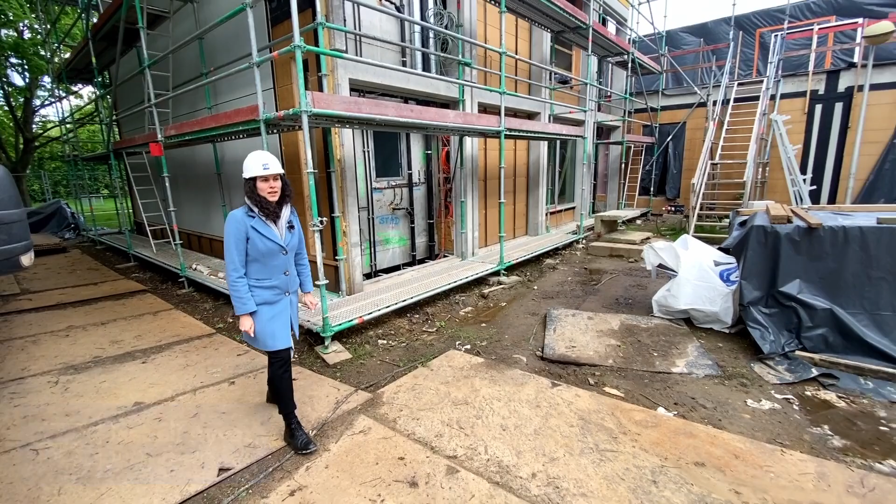Hi Waldo, thanks for having me. Hi Isabel, welcome. So what is that all? Yeah, where are we?

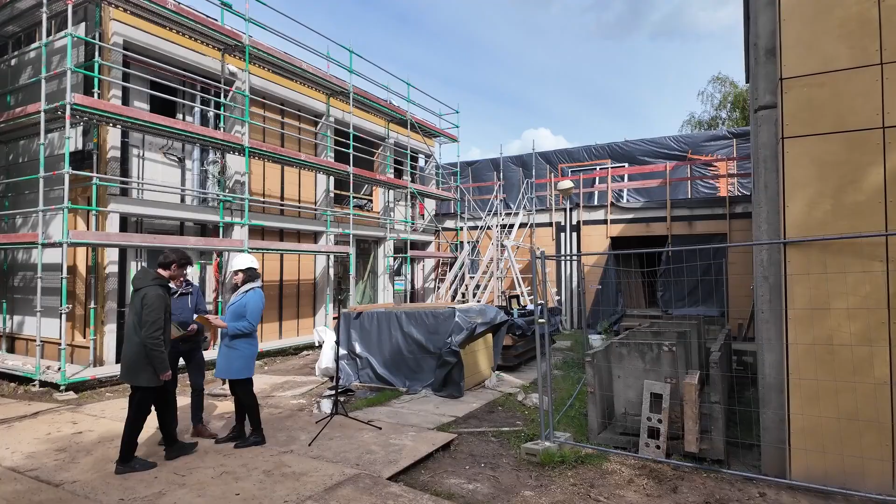This is the heart of our campus, where we have two living labs, two construction sites, where we really try to stretch the possibilities, the state of affairs in design for change.

Okay, design for change, what is that? Well, for a long time we understand now that the waste we produce during refurbishments and demolitions is not because we can't build good buildings, but because the buildings we build are not adapted and ready for future changes. So we continue to change them with the wasteful consequences and material consumption that we know. So that has to be done differently.

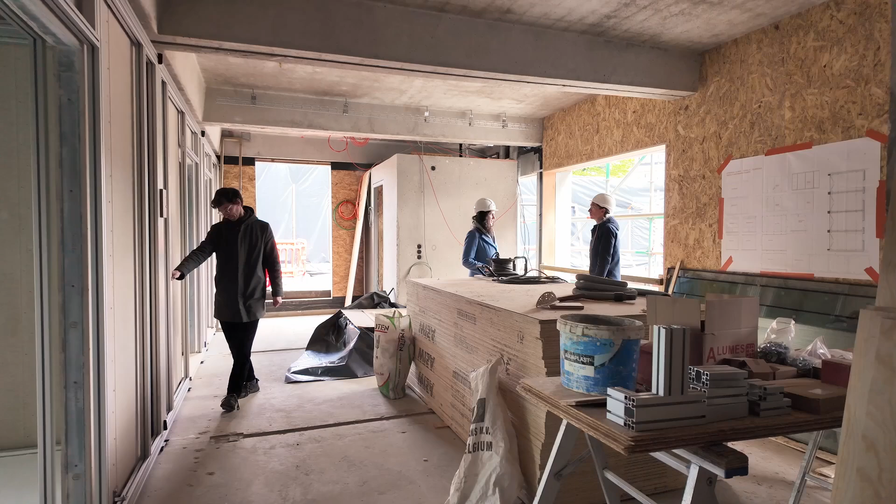Okay, so you talk about adaptability. What does that mean in the facade industry? What makes a facade adaptable? Well, there are different strategies. We can distinguish two different approaches with a different objective. First one would be design for longevity. The other one would be design for recovery and reuse of components.

Can you be specific about what that means for the facade, longevity? Well, for each of the strategies you can apply different design qualities, different execution qualities. Design for longevity would really mean that you have very generous, generic, but also robust facades. That means you have to choose materials and also spatial, architectural solutions that can stand the test of time, whatever the future function of a building will be, whether it's a house or offices or something else, then you really want high quality materials.

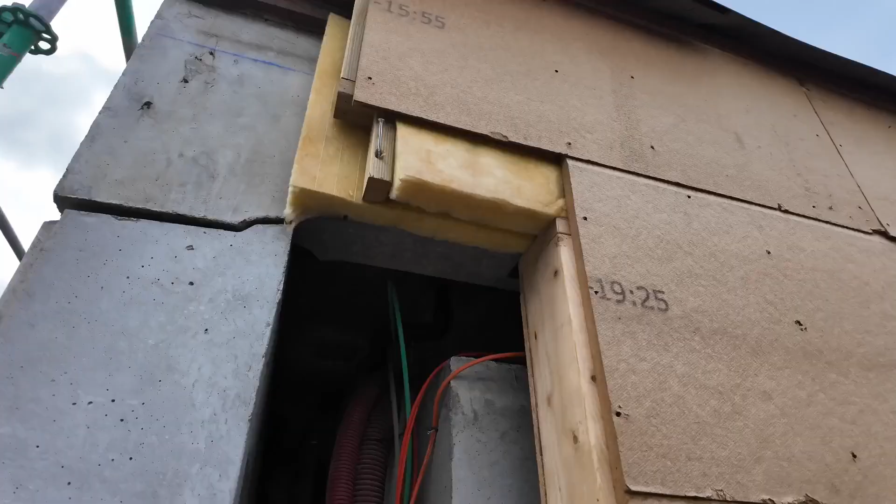Okay, and how about the second strategy? In terms of recovery and reuse of materials, it becomes really important that they have qualities like independence, both functionally, so technical services are not integrated in every part of the facade, but also that the components of which the facade is composed are easy to recover, that the connections are reversible, so that we don't damage them when we want to change a window for a door, for example, or when we want a new cladding, which may use second-hand materials already.

Okay, and can you show me something? Yeah, we have examples in the new buildings. Right, cool. Then let's go and see.

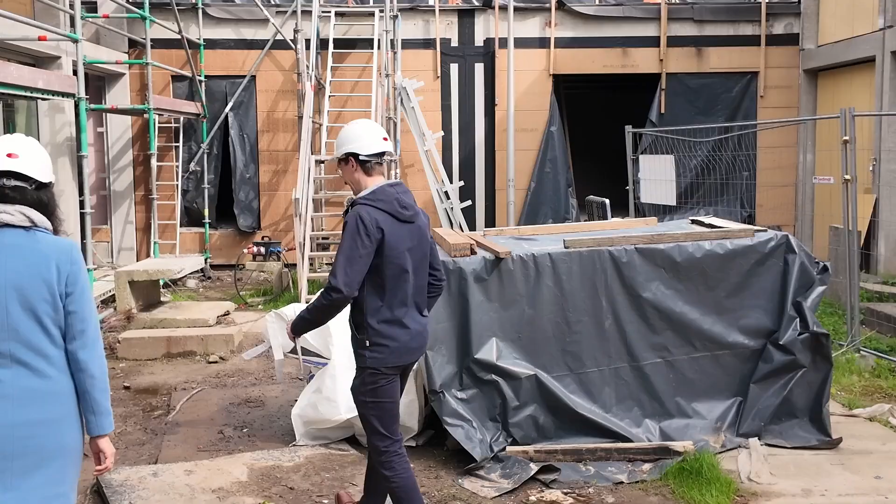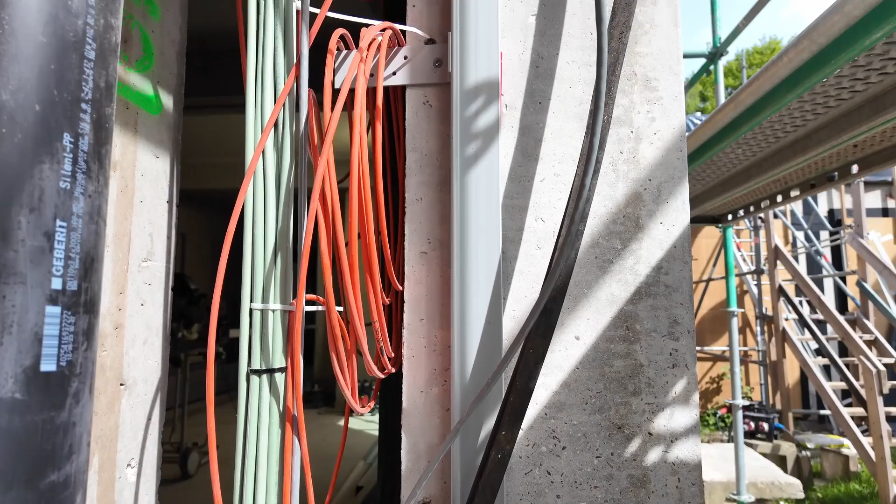Okay, so what can we see here? Well, in the Willy van der Meere Living Lab, the designers, makerarchitecten, chose an independent outside metal frame that makes the whole solution very modular, and also preserves that independence and reversibility.

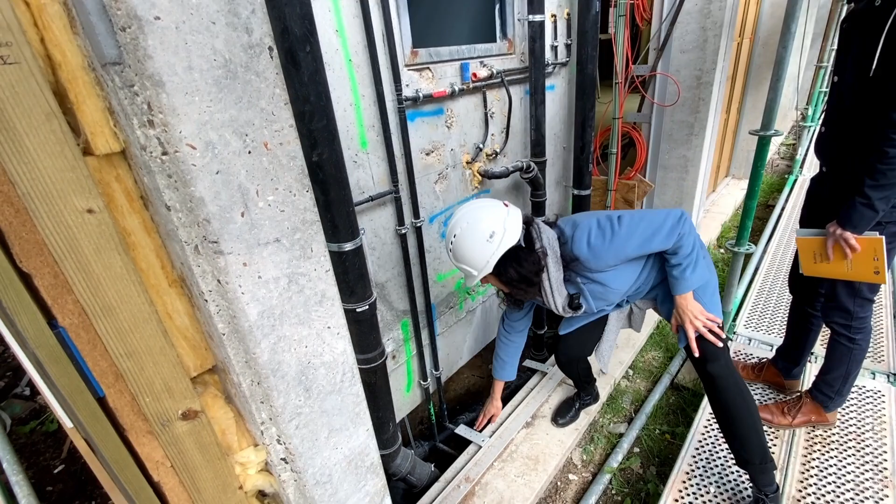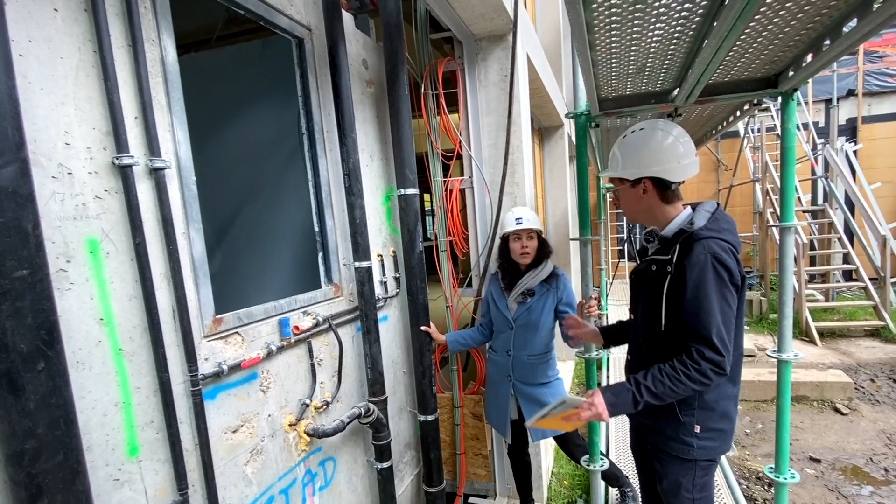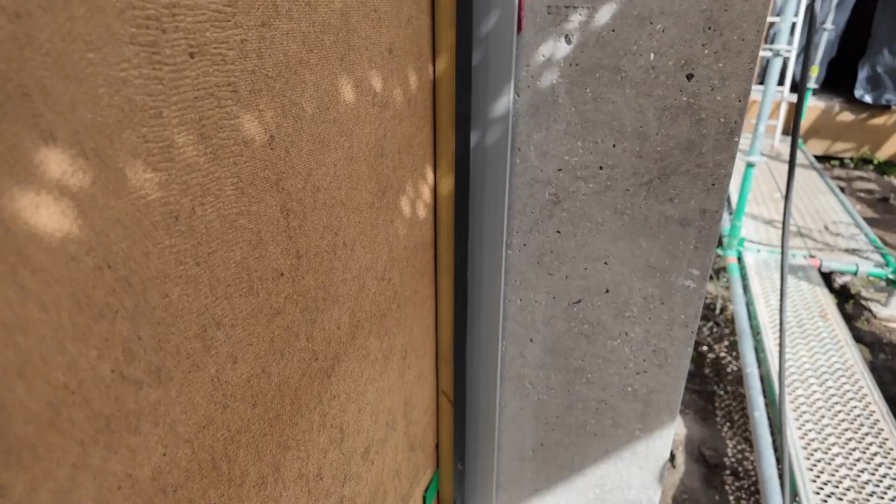So this is where the facade will be mounted. Here you can see that metal framework, which is the connector between the existing concrete structure and everything that you can imagine fits in here. Because it's so generic and makes all the connections very easily reachable afterwards, it allows you, for example, here to fill in an opaque, circular, bio-based infill solution with good energy performance as well.

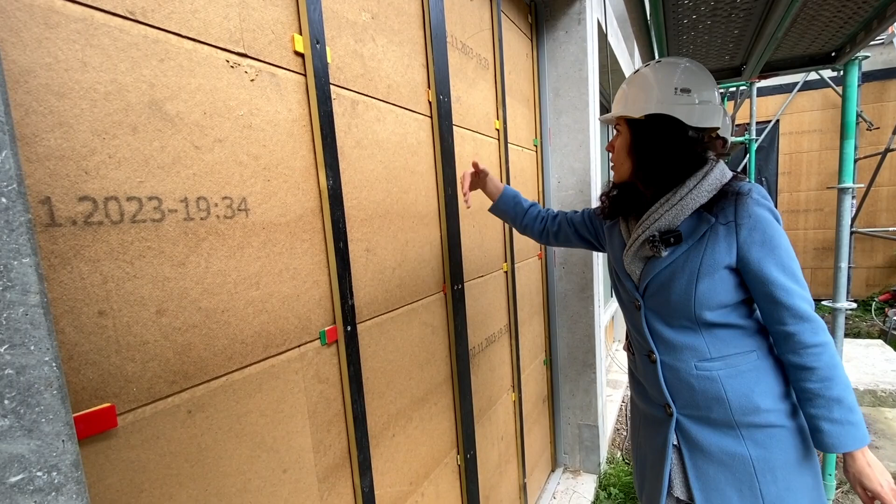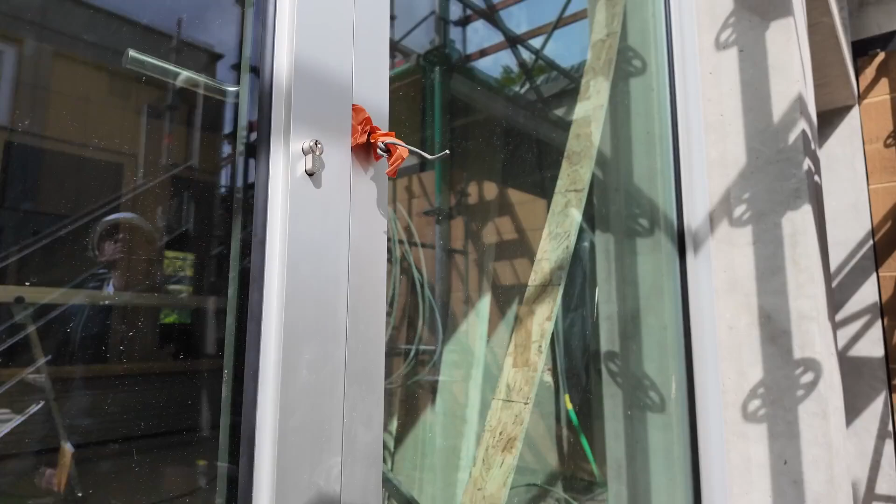So we already see installations that were installed in there, it only needs finishing. But in the same framework, you can install a complete aluminum or steel window which will be easily reachable at the inside to be disconnected. In theory, you could just demount this one and replace it with the panel next door, or upgrade or make the door smaller or bigger if this would change, for example, from now a demonstrator to student housing again, or to residences for temporary professors.

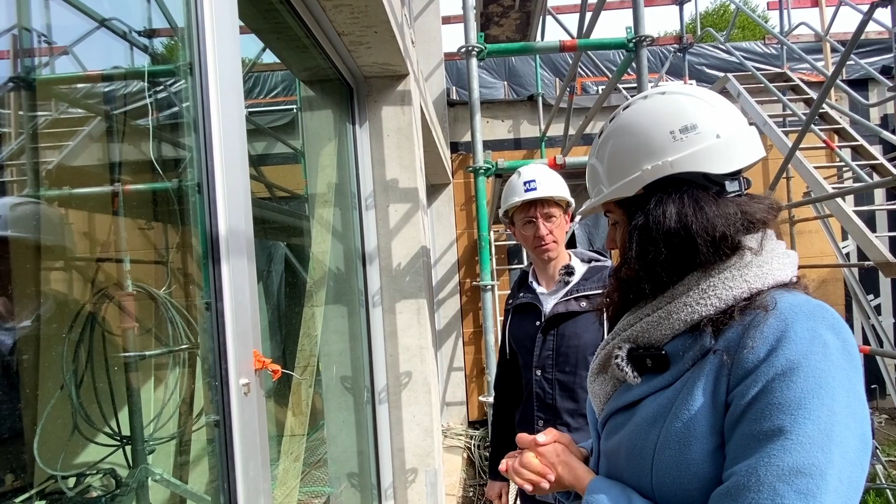Okay, all right, cool, nice to see that. Maybe afterwards we can look a bit more at details. What about challenges? What are the challenges when you do such a project and try to apply design for disassembly?

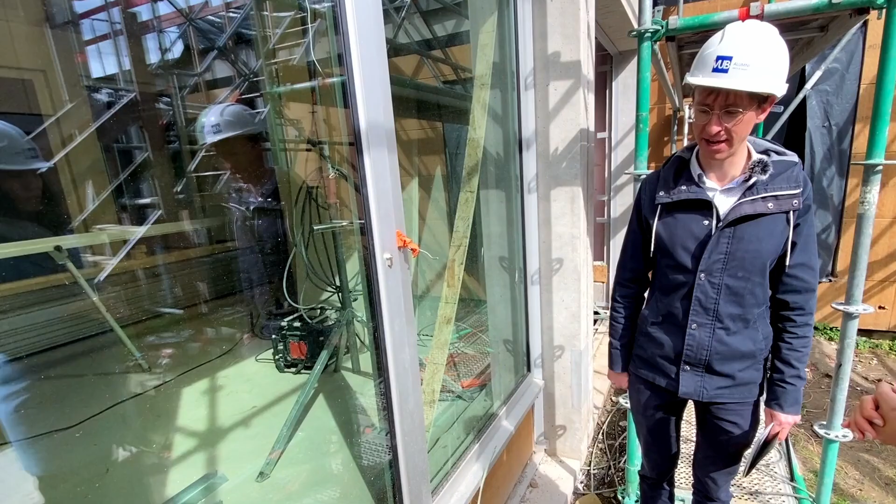Yeah, of course, it's not common practice. We have been doing things for the last few decades as easy and as fast as possible. This really requires a bit more thinking, a bit more preparatory work to make sure that, because different materials and different contractors come together, they are aligned with each other.

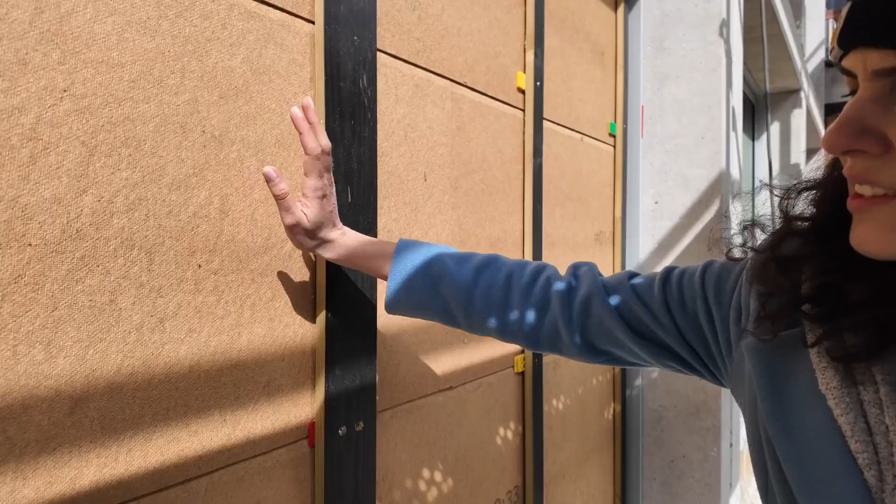For example, you have to make sure that the metal frame is indeed strong enough, but also stiff enough to hold the different infills. That is something you need to think about in advance. So also the design process will be much more integrated.

And what about timing and costs? Yeah, of course, because it's not common practice yet, and because certainly in Belgium, but also in other regions, the construction sector is so scattered. People are not used to collaborate. That requires time. But it's up to the client, like the university, to do something about that, and hire them, for example, at the same time, so that from the start on they start working together. And that's also what we did here.

Cool. All right. Thank you, Waldo, for the insights. And let's see in the exercise if we can even dive deeper and see how the connections are done.

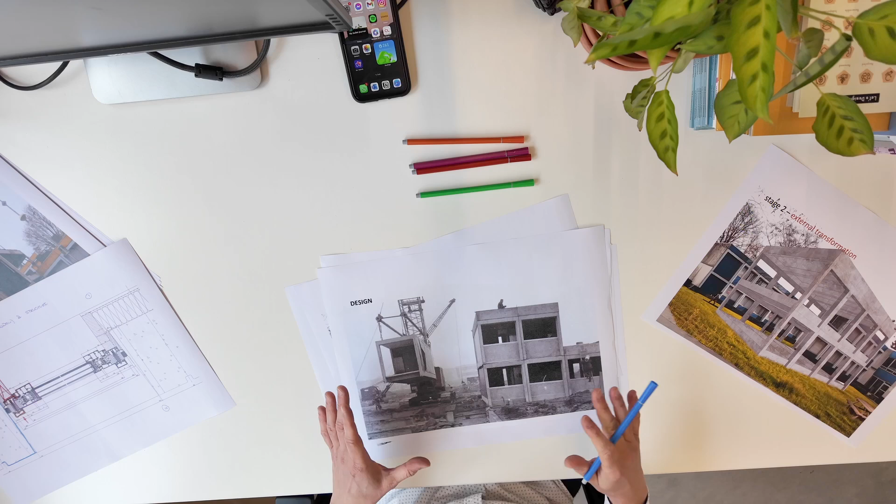Let's have a look at the construction detail of the Circular Retrofit Lab. The question was, of course, how are we going to fit out these old modules built in the 70s, prefabricated concrete modules, back up to current standards?

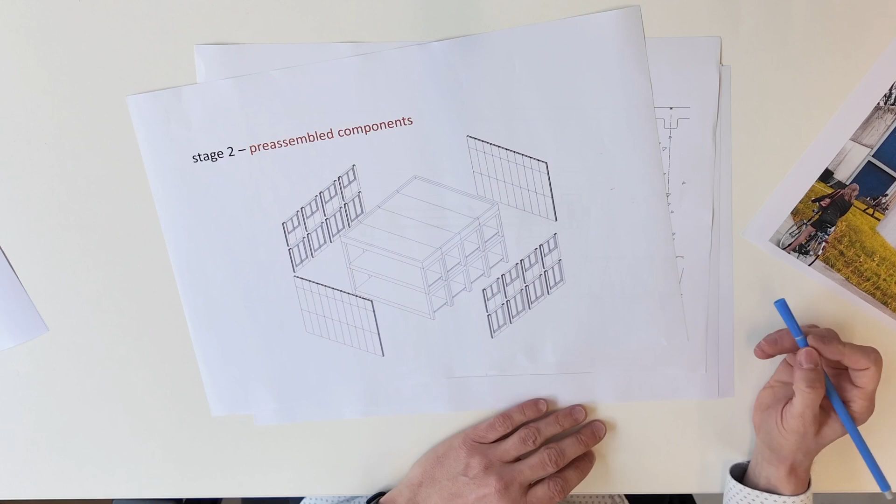Well, this is how they were looking like when we started the construction site, part of the Buildings as Material Banks research project, with the ambition to fit it out in a way of different components which could be recombined, reused very easily, really as an experiment, as an exercise in stretching the limits. How can we build as circular as possible?

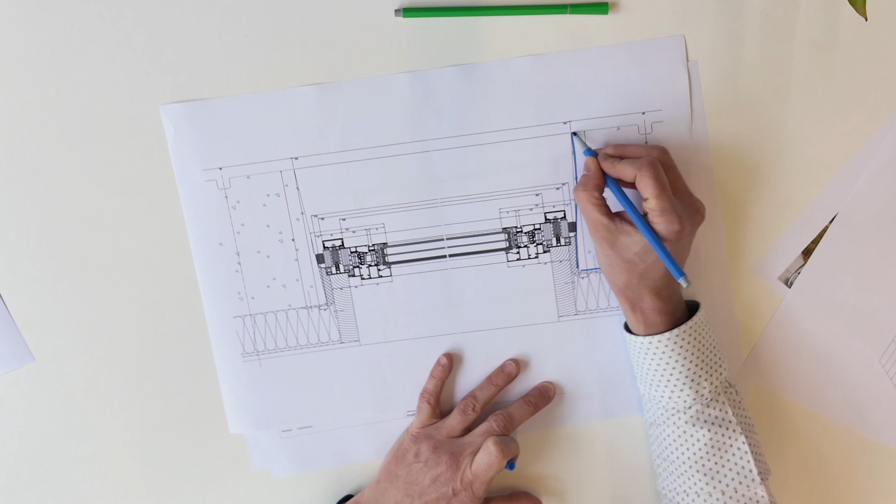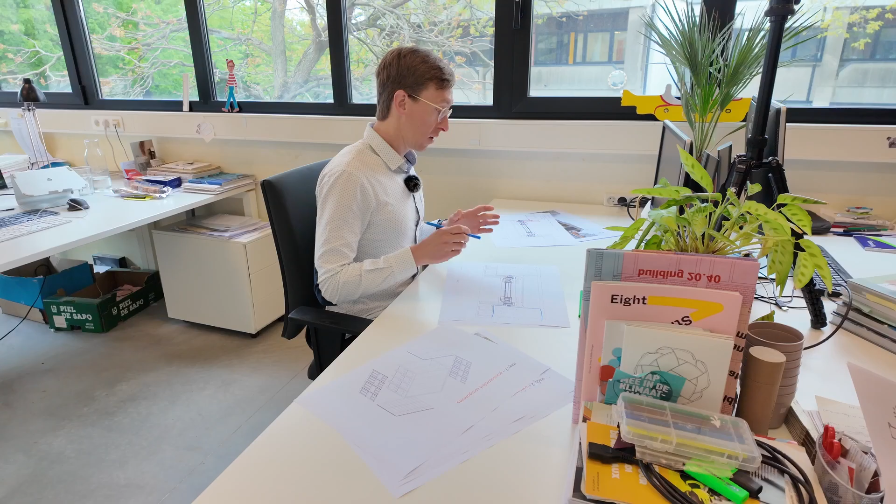This is, in the end, the result, where we have the connection between the concrete frames which were already existing and the windows which were placed on the inside, but would be easily exchangeable for other opaque insulated facade elements. The ambition was to make things as reversible as possible, meaning you can disconnect and reassemble things without damaging them, which made it important to have an intermediary part that connects the windows with the existing frames. How did we do that in the end?

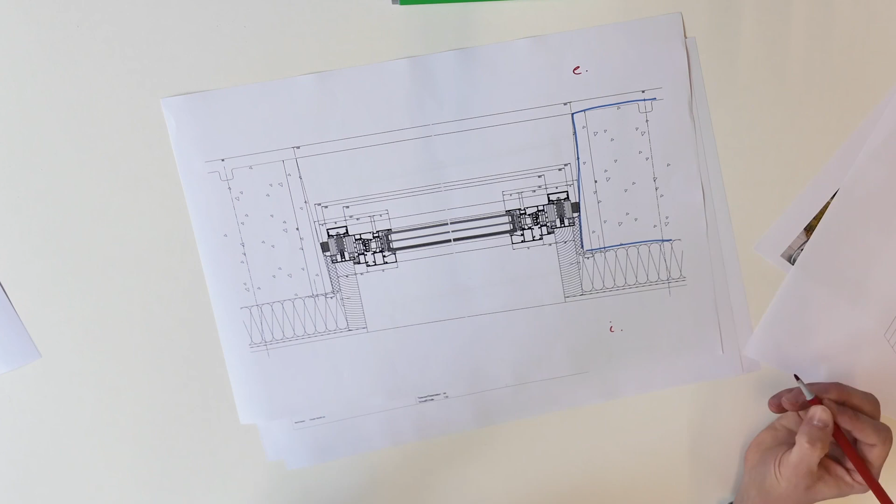So here you have the exterior of the construction detail. This is the interior part. And here it was chosen to build first on a metal strip and a wooden frame as really the placeholder for the window, which allows it to be easily connected, and wood was acceptably insulating here.

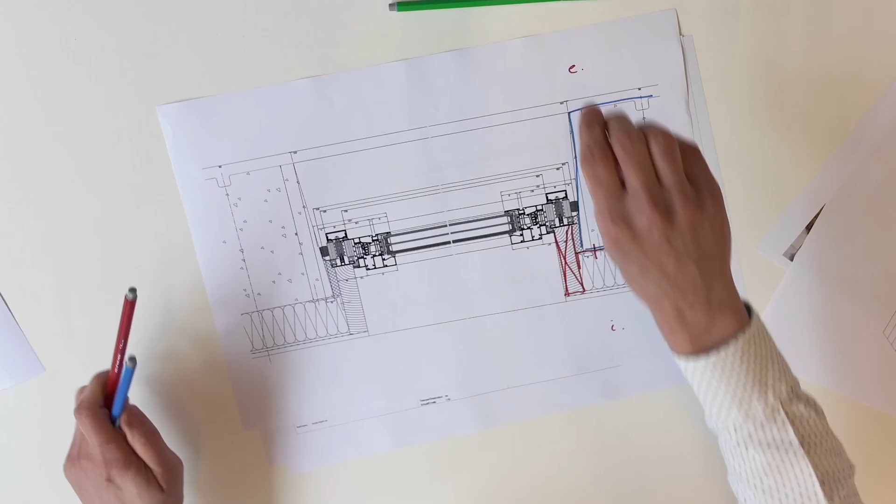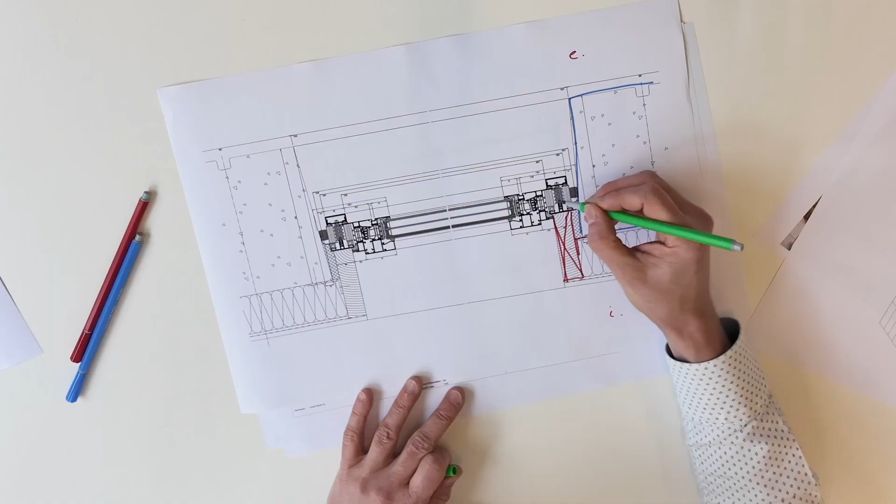It's on top of that placeholder, which runs around the window frame, that we could then connect the windows and the window metal aluminum frameworks. It's on those components, on those placeholders, that we could connect the metal frames. It's a curtain wall profile. Here you can see it. Maybe I'll take another color.

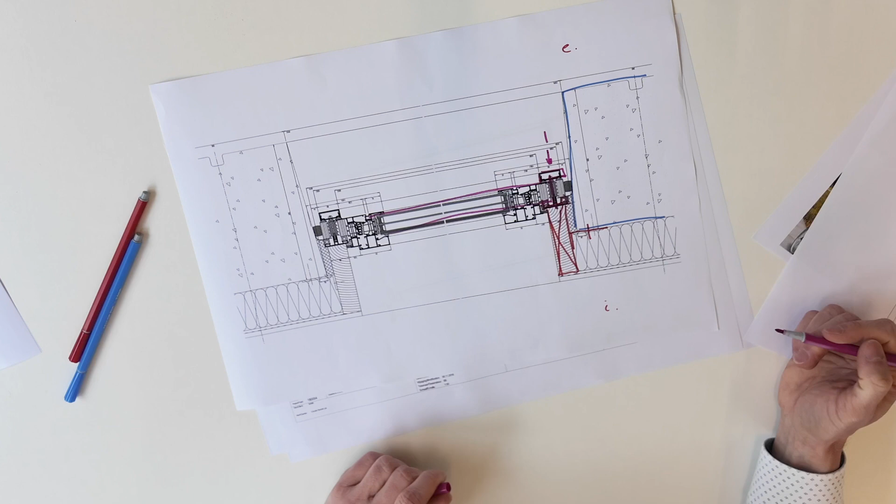The window curtain wall profiles were then the things that are easily accessible from the outside, in which the rest of the window was placed. So here you have always an accessible entry point to take the window apart again, while at the same time this could be completely prefabricated and mounted in place in one piece, but you can take it out without damaging anything of those valuable materials and components.